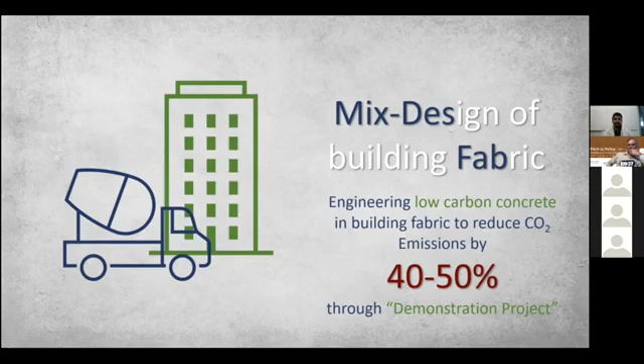The enormous use of concrete that we see around in the buildings makes me think whether there is a sustainable substitute that can impact the environment on a large scale. I am Kiran, representing the Mixed DFAB team. We are pitching with this idea, hoping to see a market transformation for low carbon concrete in place of traditional OPC-based concrete, which has been prevalent in the country for over a few decades now.

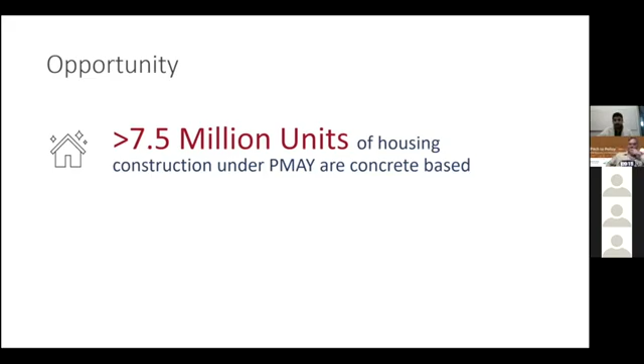The opportunity that we see is huge. The statistics show that at least 7.5 million housing units being constructed in the next few years under PMAY are using concrete-based materials in the envelope. These housing programs encourage the use of technologies that can increase the pace and quality of construction. And if we substitute with a low carbon concrete, the emission reduction potential for these houses is over 1.6 gigaton.

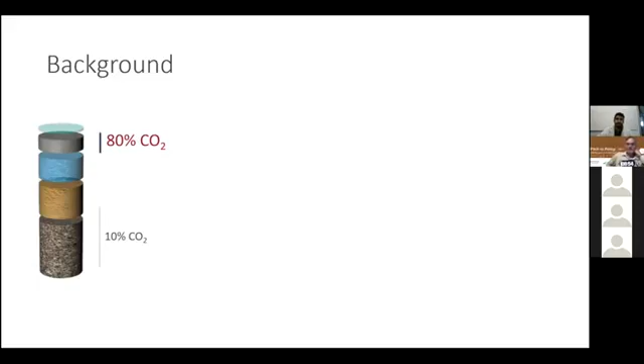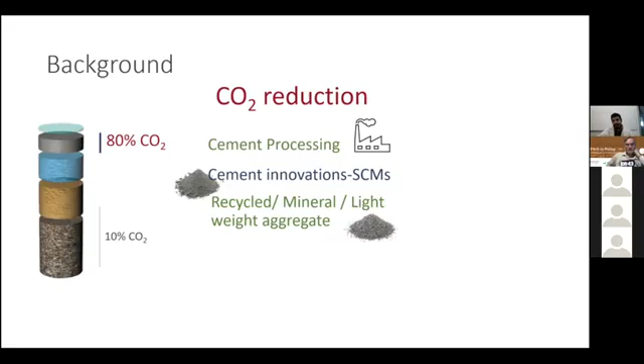If you look at the ingredients of the concrete, the cement volume is only 10%, but the CO2 emission is over 80%. The reduction of this huge CO2 emission is possible in several ways. Cement processing in the industries has become efficient because of the PAT schemes initiated by the government. Secondly, there are innovative and supplementary cementitious materials and aggregates available now, which can replace the conventional OPC-based ones. With these, we can engineer the concrete mix depending on the structural requirements based on the regional and climate context.

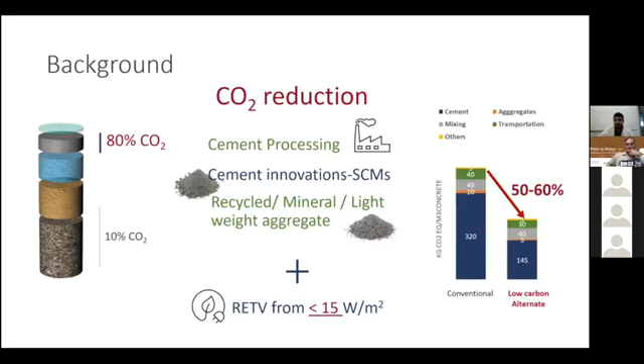Using these interventions, we can reduce the carbon emissions by 50 to 60%. While doing this, we can address the RETV requirement of ENS, which is less than 15 watts per meter square, so that we can benefit from the emission reduction from the building operation. At first, a higher cost is expected as the value chain is still in the initial stage, which can be improved as the market is getting established.

So far, we see the application of this technology mostly for non-structural applications. The technology is relatively new. Small-scale demonstrations have been carried out at the university level for structural applications. The technology is quite simple, helps construction productivity, and creates a safer and healthier construction environment.

With the support of GBPN, we plan to approach R&D organizations like NCB, policy institutes like AEEE, and rating agencies like GRIHA, who can help us to reach out to the key stakeholders to initiate and change the required momentum in the industry. So the multidisciplinary knowledge of this subject needs to be disseminated to various stakeholders involved in the construction for an inclusive approach, so that the local bodies involved in the execution of projects get benefited.

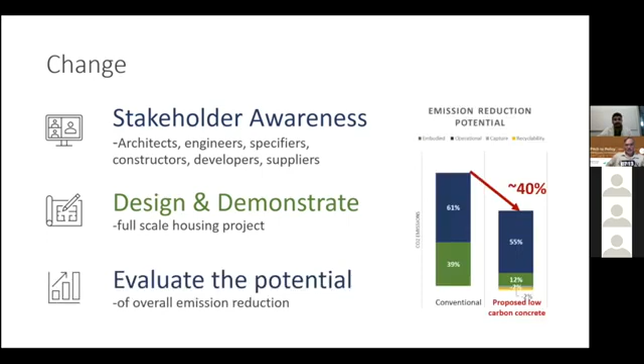We plan to involve them to design and demonstrate a full-scale housing project. We will also help to evaluate the emission reduction potential in the overall building cycle. The core benefits are thermal comfort, energy savings, and climate resilience. To achieve this, we plan to first ask the local government to pilot these technologies with one of their housing projects, and we could offer our services during design, construction, and operation stages.

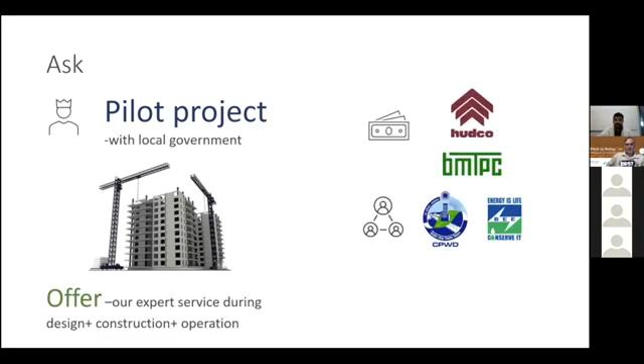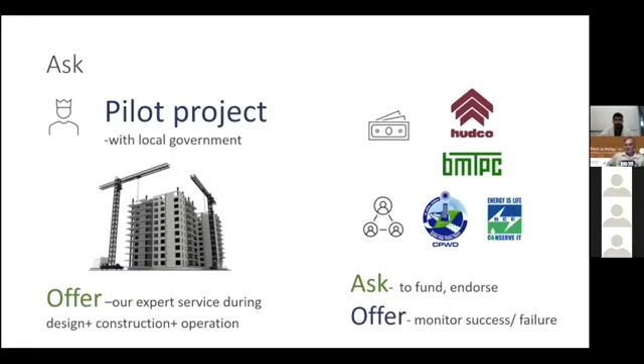We would like to involve HUDCO and BMTPC to utilize their funding schemes under demonstration projects and viability gap funding. And in return, we could monitor the project performance, and share the risk, success, and failures of the project. We also want to ask CPWD and BEE to endorse this demonstration so that it can help with quicker adaptation and change in SOR if required. We could even involve third-party assessors at this stage if required.

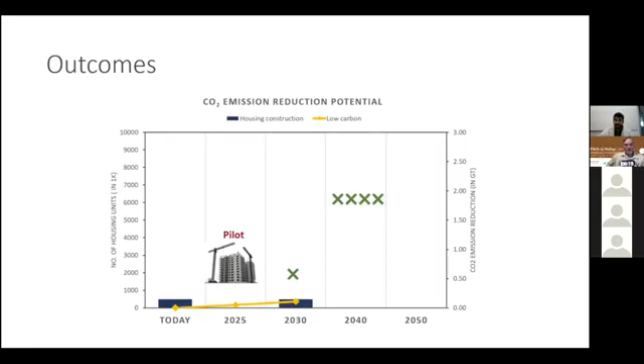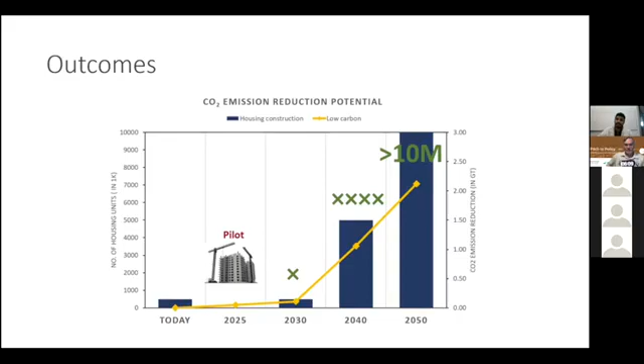With this pilot, by 2025, we can start seeing the overall CO2 reduction potential in the housing projects. And by 2030, it can multiply the impact at state level. And by 2040, it can be adopted by many other state governments and multiply the emission reduction several times. By 2050, we want to see at least 10 million new housing constructions adopt this technology and contribute to the global emission reduction.

We are a team of researchers, practical-minded, with considerable experience in basic and applied research, policy, and consultation. And our dream is to see 2 gigaton emission reduction in the housing industry by 2050 through our intervention. We would like to form alliances with other members as we go along. My colleagues from CPWD, Alma Mater, IITM, and NTU Singapore, AEEE, and GBPN to achieve this state.